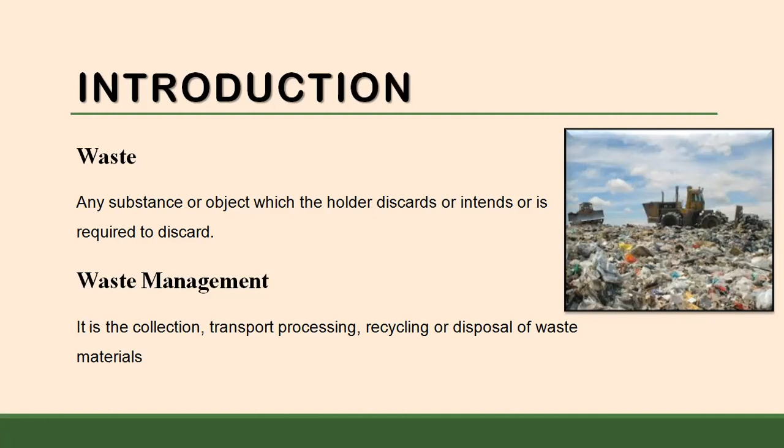So, waste management is the collection, transport, processing, recycling, or disposal of waste materials. Now, this term usually relates to materials produced by human activity and is generally undertaken to reduce their effect on health and the environment or aesthetics. Now, waste management can involve solid, liquid, gaseous, or radioactive substances. Each of these substances are supposed to be managed in different methods.

Next is our classification. So waste is broadly classified into two, based on the source or origin, and based on nature of waste. So first one is based on source or origin. It can be household waste, that is solid waste and electronics, wastewater treatment, sewage, solid waste, chemicals, healthcare or medical waste, including medicines, bandages, gloves, body fluids, body parts, agriculture or forestry, which includes pesticides, fertilizers, manure, slaughter waste, industry, textile, plastics, chemicals, constructions, concrete, metal, glass, wood, mining, waste rock, mine water, and chemicals.

Second one is based on nature of waste. It can be non-hazardous or hazardous waste. Now, non-hazardous or solid waste is all waste which has not been classified as hazardous, that is, which has not been identified as potentially causing harm to the environment and human health. Next one is hazardous waste. Now, these wastes have been identified as potentially causing harm to environment and human health, and therefore they need special and separate treatment for handling.

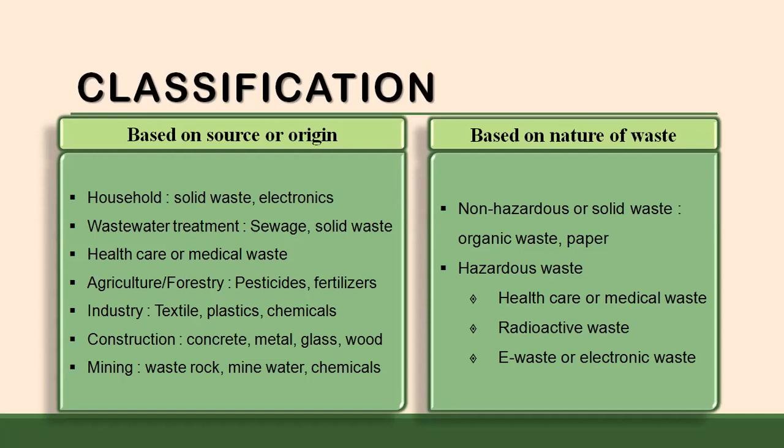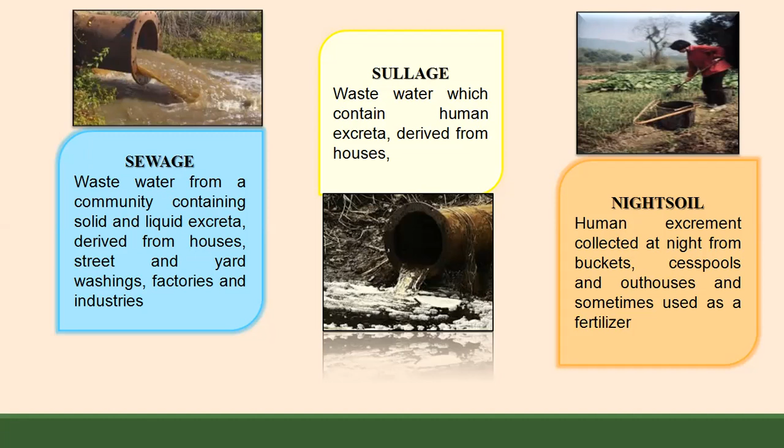The next one is we should know what is sewage, sullage, and night soil. Now, these terms are frequently used in waste and waste management. So, sewage is wastewater from a community containing solid and liquid excreta derived from houses, street and yard washings, factories, and industries. Sullage is wastewater which does not contain human excreta. Then night soil, human excrement collected at night from buckets, cesspools, and outhouses, and sometimes used as fertilizers.

Now, we know what is solid waste. So, what are the health hazards of accumulated solid waste? If solid waste is accumulated in a place, what kind of harmful effects does it cause to us? Now, solid waste is a large source of methane, which is a powerful greenhouse gas that is particularly impactful in the short term. Even in a shorter period of time, it has been found to be causing health hazards.

Then uncollected solid waste contributes to flooding, air and water pollution and public health impacts, and also causes respiratory ailments, diarrhea and dengue fever, etc. Then obviously it is unaesthetic and it produces a very bad odor.

Now, non-hazardous or solid waste management. This hierarchy is given by WHO, that is the World Health Organization, in 2014. It says that solid waste management is based on the hierarchy of waste management, that is reduce, reuse, recycle. And the fourth R was added lately, that is recovery.

So first, it is preferred to avoid generating waste and thus minimize the quantity entering the waste stream. First of all, avoid the waste which is being created. Then, wherever it is practicable and safe, waste items that can be recovered for secondary use should be used for that. That is the preferable method. Wherever recycling is possible, it should be done.

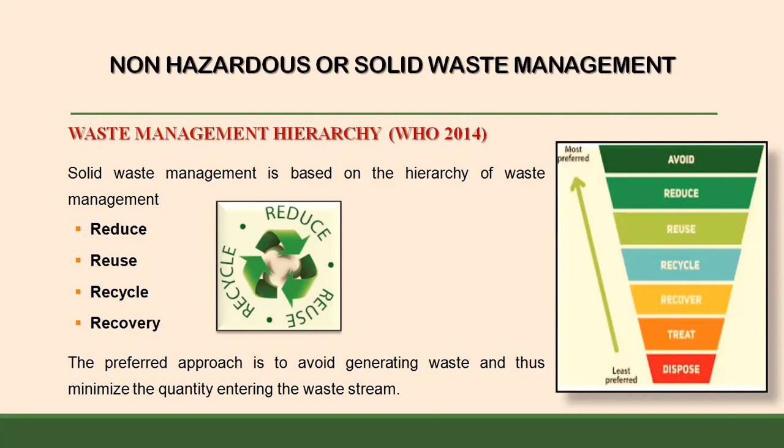Then, waste that cannot be recovered must be dealt with the least harmful options like treatment or land disposal so that it reduces the impact on health and the environment. Then we have to segregate. Now we know what is waste and what are the health hazards of accumulated waste. So what do we do next? We have to segregate the waste. Waste segregation is very advantageous and it has to be broken down into different sectors. Here we break it down into recyclable waste, biodegradable waste and non-recyclable waste.

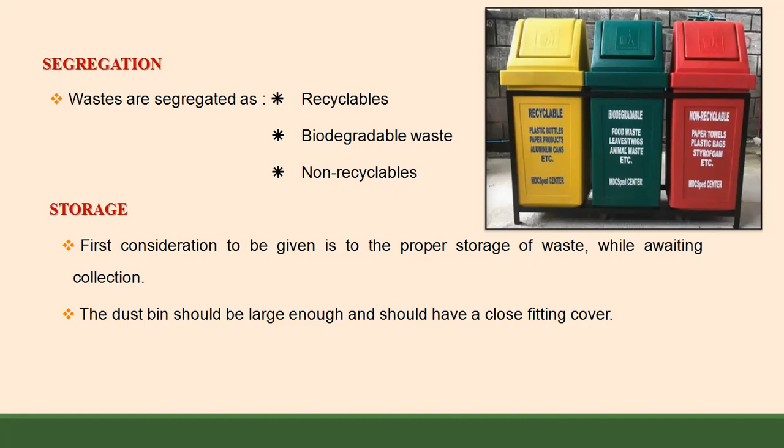Then after segregation, sometimes the waste is not collected at that particular time, so you have to store the waste. Every day waste might not be collected. With household or house to house waste, where the municipality people come and collect waste, that might not happen daily, maybe alternate days. So you have to store the waste. For storing the waste, proper dustbins should be provided, large enough and with close fitting covers. Proper storage of waste is very important while you're awaiting the collection.

Then comes the collection of waste and transport. Waste collection is the collection of solid waste from the point of production, that can be residential, industrial, commercial or institutional, to the point of treatment or disposal. Municipal solid waste is collected in several ways. There can be house to house waste collection, where waste collectors visit each individual house to collect garbage and the user generally pays a fee for this service.

Then it can be community bins. We have seen big community bins in the areas. Users bring their garbage to community bins that are placed at fixed points in a neighborhood or a locality. When we are living in community living areas or even flats, they have these waste collection bins outside. The municipal solid waste people come and pick up on the designated or scheduled day.

Then curbside pickup. Users leave their garbage directly outside their homes according to a garbage pickup schedule set with the local authorities. Then self-delivered. You can go and deliver the waste as well, as in generators deliver the waste directly to the disposal sites or transfer stations, or hire a third party for this waste transportation.

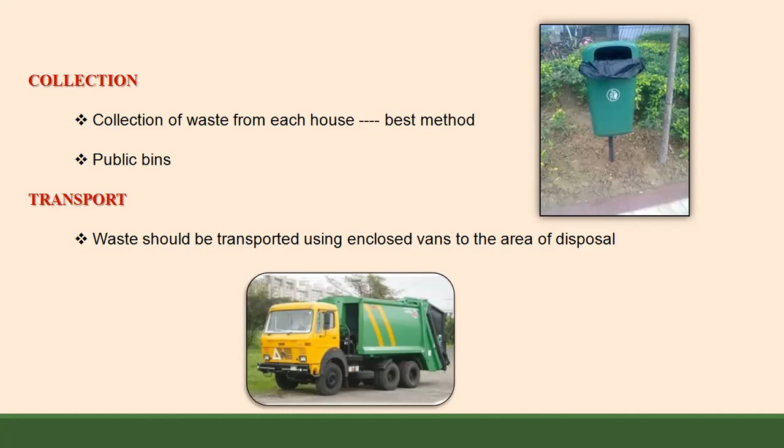Then contracted or delegated services. Here businesses hire a firm, like a municipality with municipal facilities, which schedules the collection with the particular customer for a nominal charge. So that is how waste collection happens. For transportation, waste should be transported using enclosed vans to the area of disposal. There are different methods of solid waste disposal: dumping, controlled tipping or sanitary landfill, incineration, composting, manure pits, and burial.

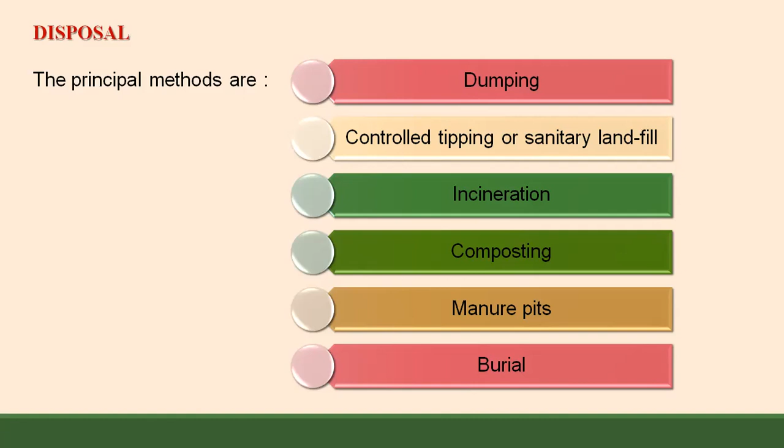First one is dumping. Dumping is basically where the refuse, whatever the waste is, is dumped in low-lying areas. Advantages are it is the most economical, easy method of disposal of dry refuse, and it is suitable for reclamation of land. As a result of bacterial action, the refuse decreases considerably in volume and is gradually converted into humus.

Disadvantages: the refuse is exposed to flies and rodents because it's not covered with earth. It is a source of nuisance because of the smell and sight, again because it is not covered. The loose refuse is dispersed by the action of the wind, since it is just dumped in a low-lying area. Then drainage from dumps contributes to the pollution of surface and groundwater. If there is any water source nearby, drainage might lead to water pollution.

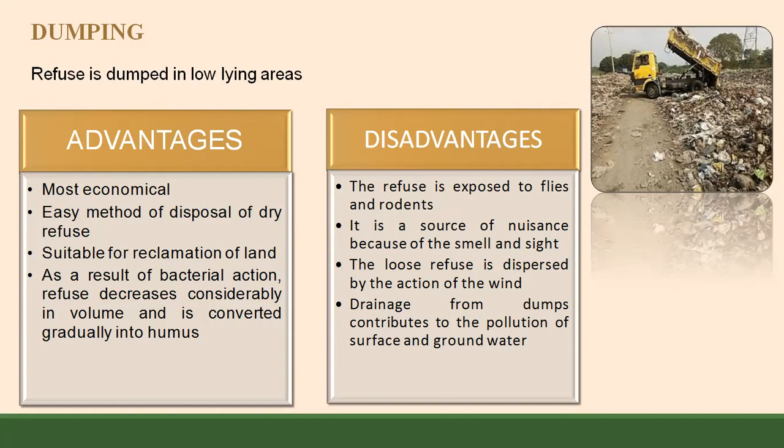Next one is controlled tipping and sanitary landfill. Now, landfills are an important part of any urban waste management system. So there are three different methods of this controlled tipping and sanitary landfill: the trench method, ramp method, and area method.

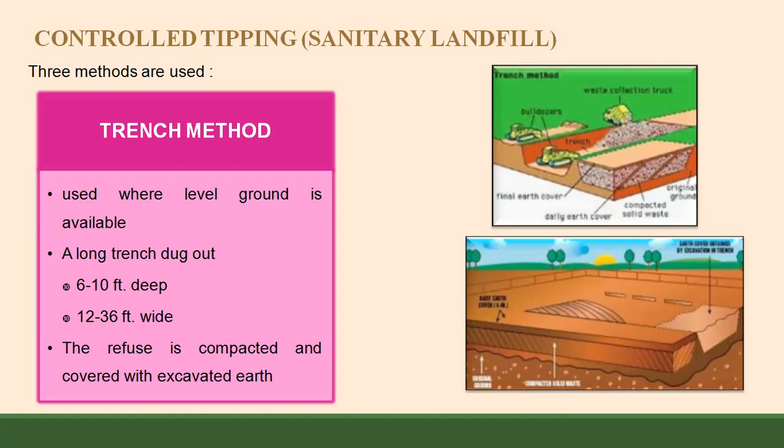In the trench method, we have to first look for a level ground. In this diagram, you can see you have to look for a level ground, and then a trench is dug out, which is 6 to 10 feet deep and 12 to 36 feet wide. So the depth of the trench should be 6 to 10 feet, and the width of the trench should be 12 to 36 feet. Now the refuse is compacted and covered with excavated earth.

Next method is the ramp method. So here in the ramp method, the area which we use is moderately sloping. The terrain is moderately sloping and some excavation is done to secure the covering material.

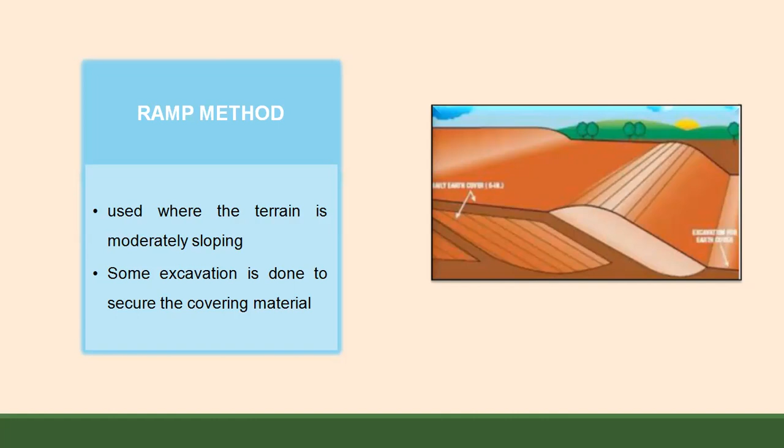Next is your area method. Now this area method is used for filling land depressions. Wherever certain land depressions are there, where land is not even, in that type of area it can be used. So it's used for filling the land depression. The refuse is deposited and it is sealed by the exposed earth or mud cover.

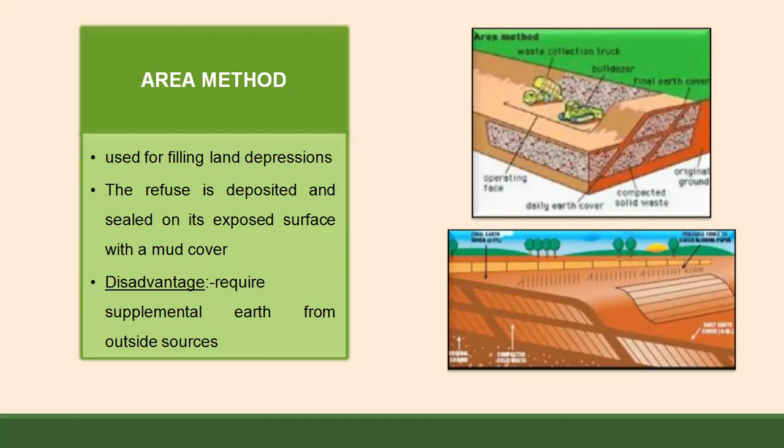And this method has a disadvantage of requiring supplemental earth from an outside source because there is land depression. So there is no sufficient land there. So to cover the refuse, you need supplemental earth.

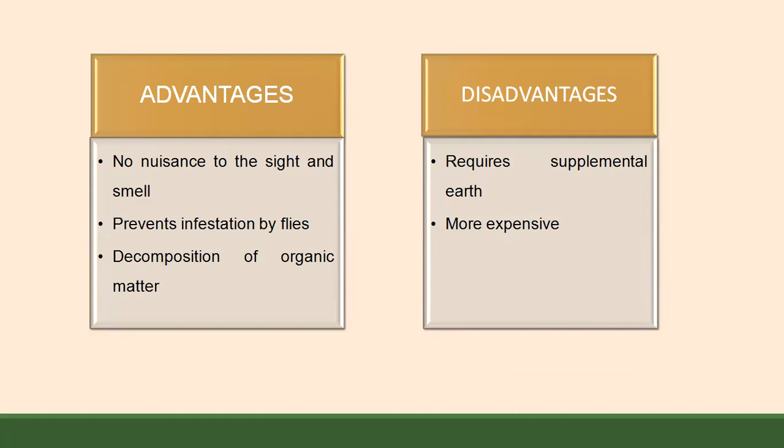Then advantages: there is no nuisance to sight and smell, like in dumping we had. Then it prevents infestation by flies and decomposition of organic matter, because the refuse is covered. So the disadvantages which we had in dumping, here they become the advantages. Then disadvantages: it requires supplemental earth, as I told in the area method, and it is a little more expensive.

Next method is incineration. Now, incineration refers to the combustion of waste under controlled conditions. Here the refuse can be disposed of hygienically by burning or incineration. And it requires preliminary separation of dust or ash from the refuse. It's basically used in healthcare waste disposal, and it is a little expensive because we have to plant the incinerators.

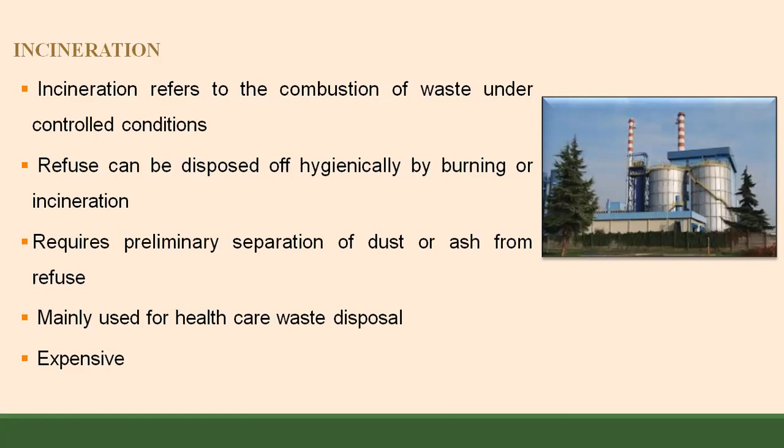Then the next one is composting. Now, composting is a process that optimizes the natural decomposition of food, garden, and agricultural waste into a fertilizer-like product that is called compost. Here the volume of the organic waste can decrease by around 60 to 90% as a result of this composting.

Now, this is a relatively low cost strategy wherein you can convert the waste into organic nutrients which can enrich the soil of farms, parks, and household gardens. The principal byproducts of this are carbon dioxide, water, and heat. The matter is broken down under bacterial action, resulting in the formation of a relatively stable humus-like material that is called compost.

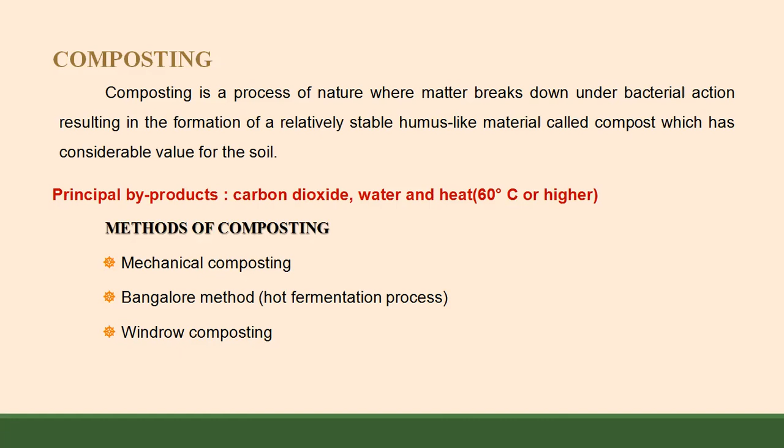And the byproducts I told, that is carbon dioxide, water, and heat, almost 60 degrees Celsius or higher. So it destroys all the pathogenic agents which are present. And there are different methods of composting: mechanical composting, the Bangalore method or hot fermentation process, and windrow composting. The first one is mechanical composting, which is an aerobic method.

Now, the mechanical method drastically speeds up the natural decomposition process by closely controlling the temperature and oxygen levels in a composting chamber. First you have to clear off all the salvageable material like rags, bones, metals, glass, and other items which are likely to interfere with the grinding operation.

Once you clear off all of this, the waste is then introduced into the pulverizing chamber, where it is pulverized into smaller pieces to reduce the size of the particles. It is then mixed in a rotating machine so as to turn or agitate the material at periodic intervals to speed up the breakdown of waste.

Now, once the organic material is processed, it must sit outside of the vessel to allow completion of the decomposition process. This maturation stage can take around 4 to 6 weeks. This method is more expensive than the other methods, but it requires less land because of the faster processing time.

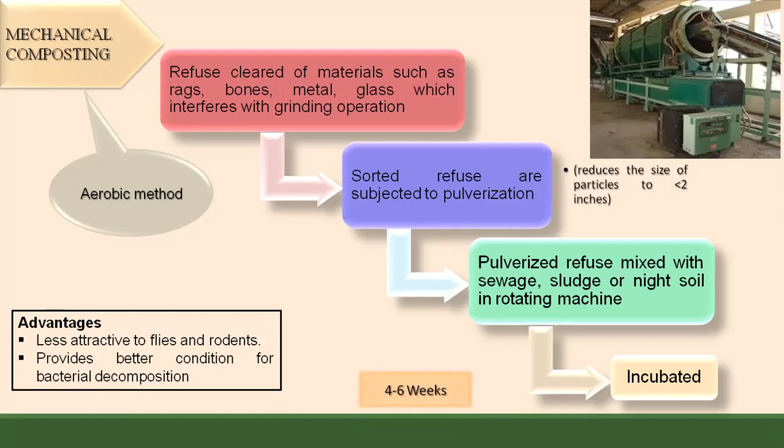Advantages: it is less attractive to flies and rodents, provides better condition for bacterial decomposition. Next method is the Bangalore method or the hot fermentation process. Now here what happens? It's an anaerobic method and it was developed by the Indian Council of Agricultural Research at the Indian Institute of Science, Bangalore.

Here trenches are dug. So here again we have to dig trenches. Now these trenches, they are dug based upon the amount of refuse and night soil we need to dispose. Depths greater than 3 feet are not recommended because of slow decomposition. So depth which is approximately 3 feet or less than 3 feet is enough so that there is faster decomposition, and the pits should be located at least 800 meters away from the city limits.

Here we have layers. So first layer of refuse is spread at the bottom of the trench. Over this, the night soil is added. Then alternate layers of refuse and night soil are added till the heap rises 1 foot above the ground level. So it should rise at least 1 foot above the ground level. Then the top layer should be of refuse and at least 9 inches in thickness. Then the heap is covered with excavated earth and it is compacted.

So here in the image you can see first there is refuse, then night soil, then refuse, then night soil, and then refuse. So here the last layer of refuse should be at least 9 inches in thickness. And overall it should be 1 foot above the ground level.

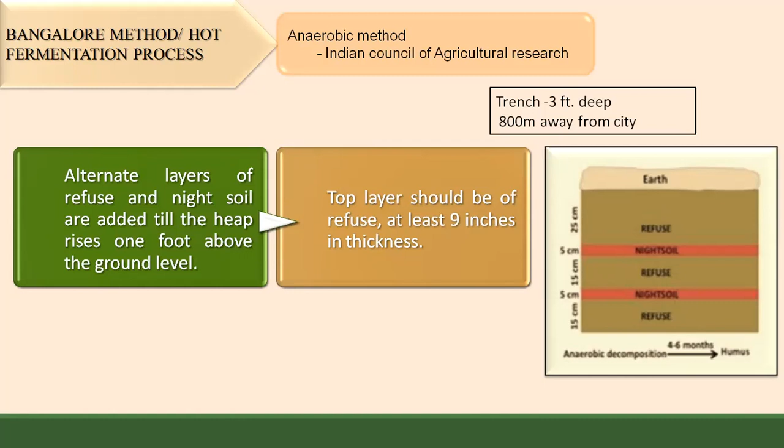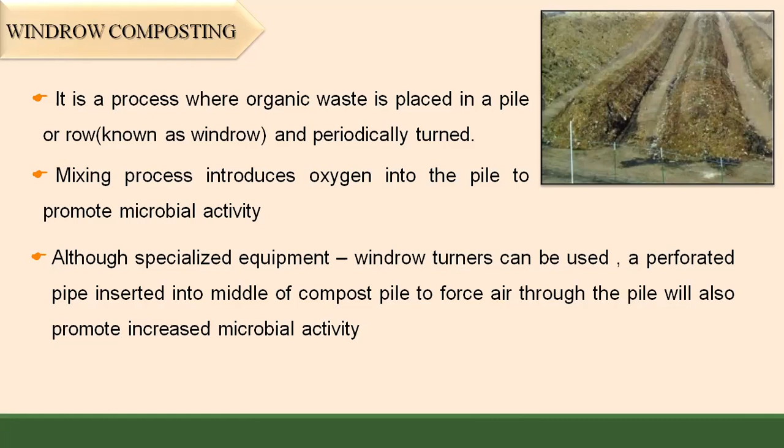Next method of composting is windrow composting. Now, windrow composting is a process where organic waste is placed in a large pile or row, which is known as a windrow. Here you can see in the image. And periodically it is turned. The mixing process introduces oxygen into the pile to promote microbial activity. Specialized equipments are needed and they are known as windrow turners. These can be used for this purpose, and inserting a perforated pipe into the middle of the compost pile to force the air through the pile will also promote increased microbial activity.

Next one is the manure pits. Now these manure pits are basically done by individual householders. It's an easy method of waste disposal. So here what happens, the individual householders dig a place, maybe in the kitchen garden or somewhere in the backyard, where they dump the garbage, cattle dung, straw, and leaves, and they cover it with earth after each day's dumping. So, in around 5 to 6 months' time, the refuse is converted into manure which can be returned to the field.

Now, this method of refuse disposal is very effective and relatively simple in rural communities. This is mostly done by people who are living independently in houses where they have a backyard and a kitchen garden. Next one is the burial. Now here a trench is excavated, and at the end of each day the trench is filled with earth and is compacted. This method is suitable for small camps and all. So these are the different methods of solid waste disposal.

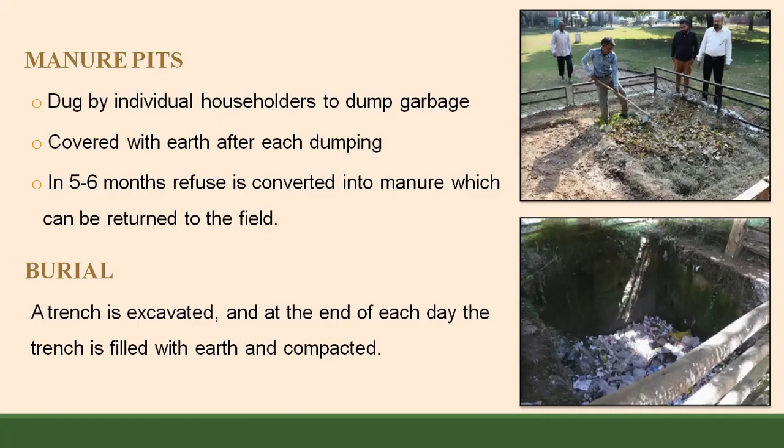So I hope now you are able to understand what is waste and waste management, how to classify waste, what are the health hazards of waste, and how do you manage the solid waste by dumping, sanitary landfill, controlled tipping, composting, manure pits, burial, incineration, etc.